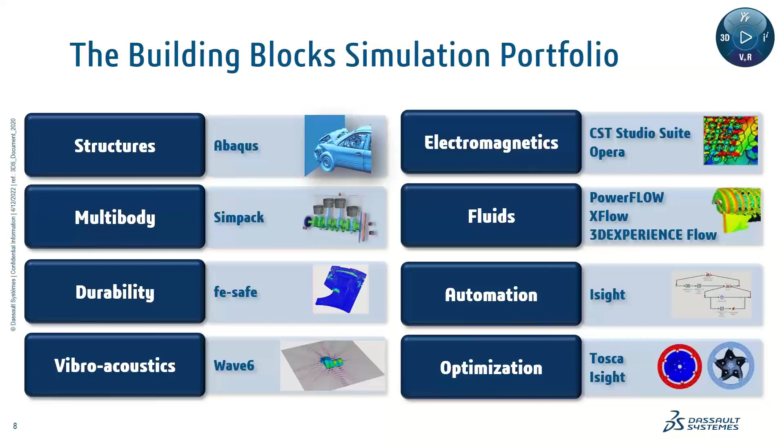So here's a quick agenda. I'm going to introduce Ramesh in just a second here. We're going to start by finding the best design. We're going to look at some structural integrity, then some advanced structural analysis, and then that'll be Ramesh. I will come back and talk about some of the other physics that are out there. And then we'll wrap it up with Q&A and some next steps or call to action.

And so without further ado, I'm going to turn it over to Ramesh, and let's go find the best design in some of our machine parts there. Ramesh?

So what we're going to do is, you saw in the introduction video, the customer was actually one of those highlighted, and so we're going to take their assembly. This company is a SolidWorks customer, a top international manufacturer based out of Lima, Peru. They make underground drilling machinery and related equipment that provides a better and more cost-effective alternative to traditional drilling rigs. For this first section, I'll be using a sub-assembly part from the leading mining equipment, called the Bolter 77D model.

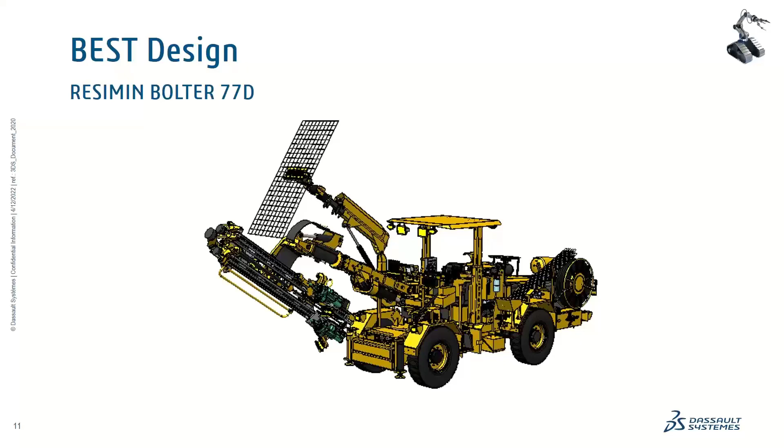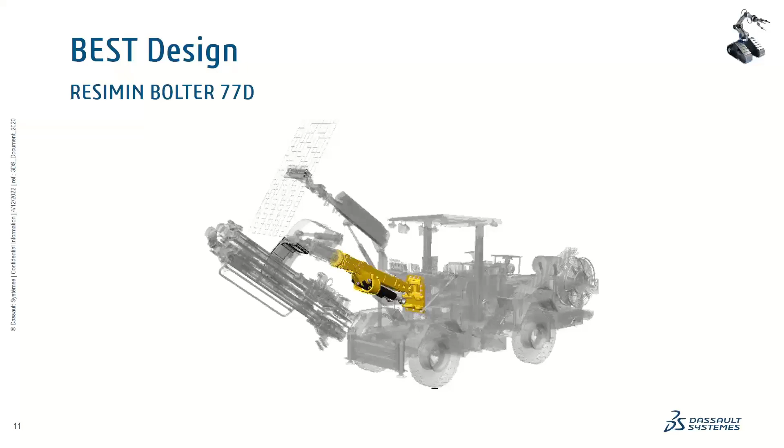Now, am I going to analyze the full assembly as shown here? Probably not. With simulation tools, the best way to achieve success is a crawl, walk, and run approach. We want to focus on the most important and critical pieces of the assembly rather than taking the entire assembly in the first go and running into issues.

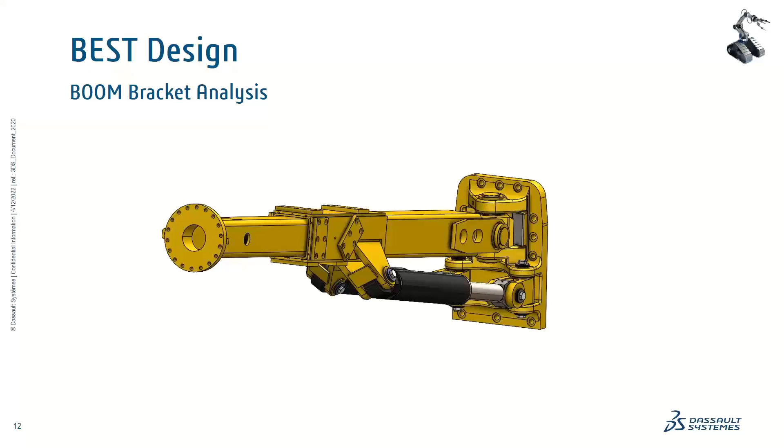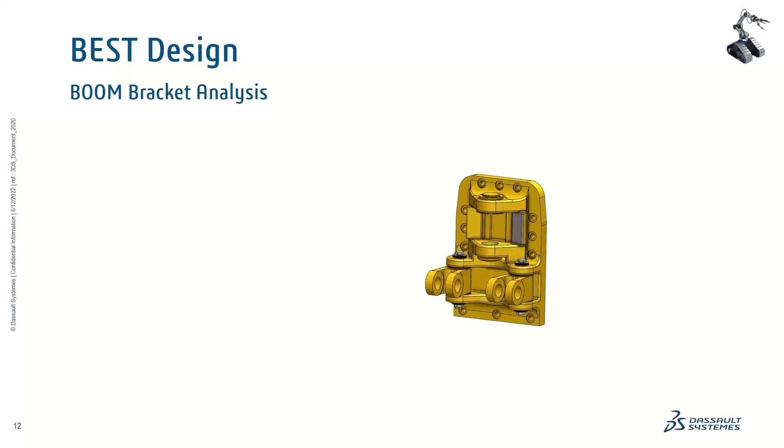So let's drill this down a little bit more to focus on this bracket assembly, which takes on the brunt of the loading. You can see how the entire boom assembly is cantilevered to this bracket, and this bracket actually has a knuckle joint. We'll analyze this knuckle joint as a designer.

So as a designer, let's say I'm in charge of the design process, but I'm also in charge of basic simulations. That could be just understanding the strength of the part, or being able to do a couple of design iterations, taking the design of this knuckle joint from point A to point B and coming up with an optimal design.

Then as a designer, I can pass on the best design to, let's say, the engineer or analyst within the company. That person could actually do a more comprehensive, complete simulation of the entire bracket assembly. So let's get started with looking at designer level simulation.

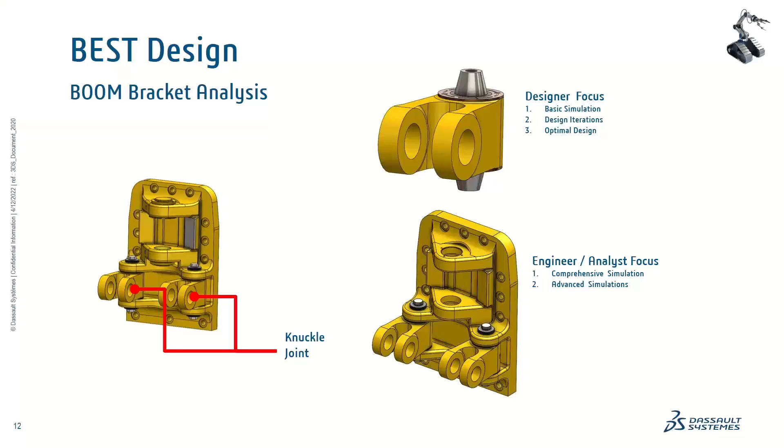What does this entail, right? So as always, I'm going to start off in SolidWorks. I have this bracket assembly, and it's only just half of the bracket assembly I'm going to analyze. That's a nice thing about simulation - you can take advantage of symmetry in the model and really simplify the analysis time and simplify the simulation itself.

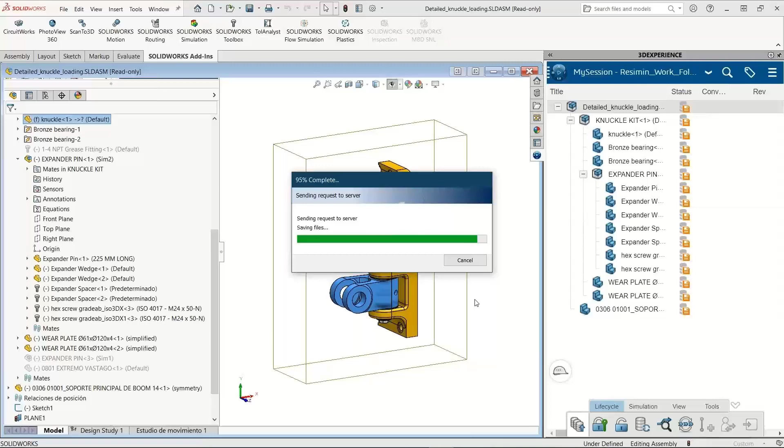So the first step, before I start using simulation, is to push this geometry through this connector into the 3DEXPERIENCE platform. That's where my simulation tools reside. It's a simple save operation - I'm pushing all the elements and parts of this assembly into the 3DEXPERIENCE platform. It's just a work folder on the cloud where all the files can be saved and converted into a format usable not just for simulation tools, but also by other applications relevant for your analysis needs.

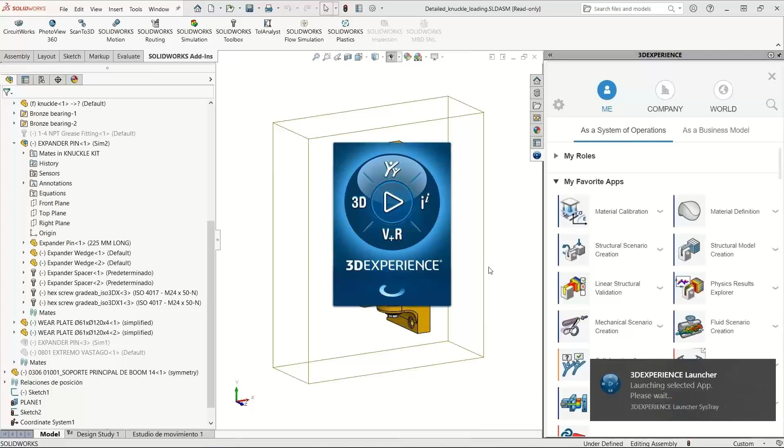So all I'm doing here is waiting for a green check mark, so that way I know all the files have been uploaded. Once I get a green check mark, then within SolidWorks, I can go ahead and launch my Linear Structural Validation. This is the simulation tool that allows me to do linear static analysis and any linear analysis, like buckling, thermal, or even frequency analysis. I'm just launching it right from within my SolidWorks desktop, and once the model is loaded up into the platform, I can start my simulation process.

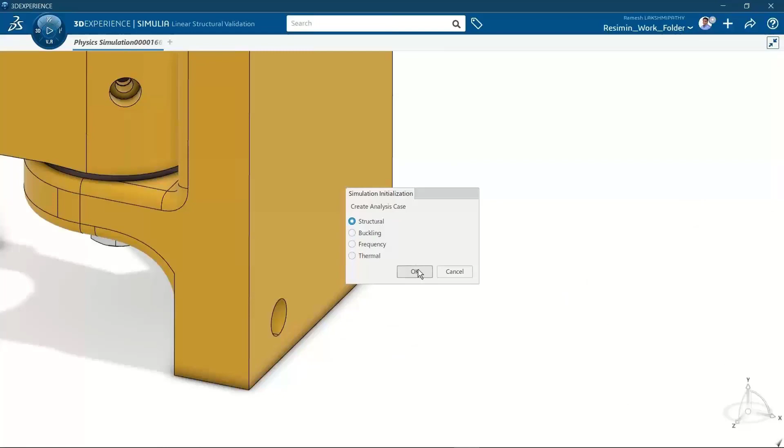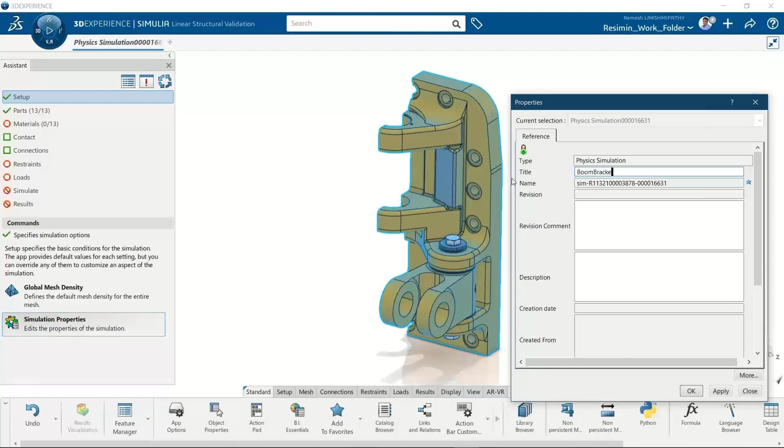All right, so let's go ahead - there you go. All I have to do is get started with my simulation. The first step is really what's the type of analysis. As a beginner, or let's say as a designer, I want the program to guide me through the process, so I'm going to use the assistant you're seeing here on the left side of your screen. I'll go ahead and set up my simulation, giving it a unique name - let's call it boom bracket simulation. Very simple step, that's basically done.

Next, I'm just going to go ahead and apply some mesh options. I'm going to turn on the adaptive meshing. As a designer, I don't want to wrestle with the meshing, but let the program automatically hone in on the best meshing for me. So that's what adaptive meshing does.

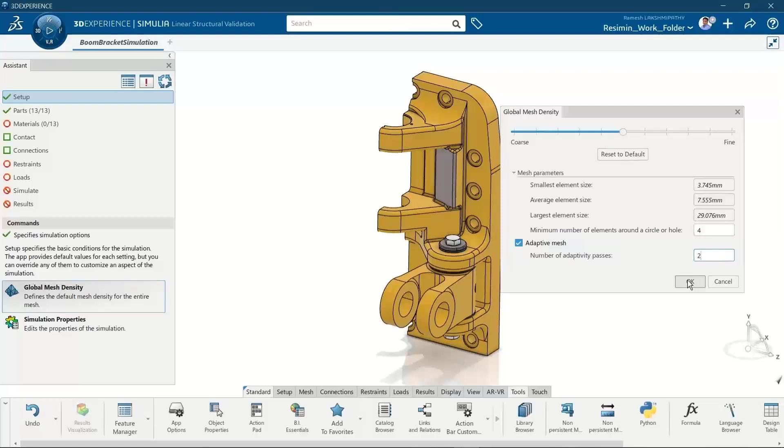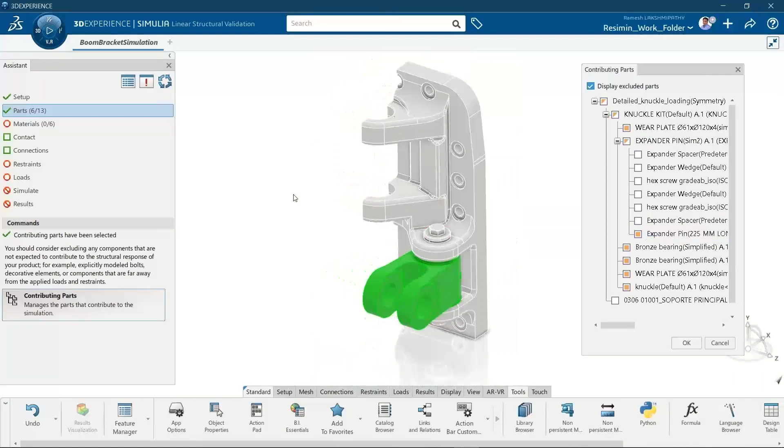All I'm going to do is just go ahead and tell the program to mesh. Then I'm just going to tell the program, look, as a designer, I just care about the knuckle joint, so I'm going to exclude all the other parts of my assembly. A very simple unchecking of the options helps me get to the geometry that I want to analyze. The green part is the geometry I want to analyze, and the gray ones are the ones I exclude from the analysis.

Next, I'm just going to go ahead and apply some materials. The nice thing about the 3DEXPERIENCE platform simulation is it comes built in with a material palette, so there's a library of materials ready to use, or if you want to define custom materials, that's also an option you have access to.

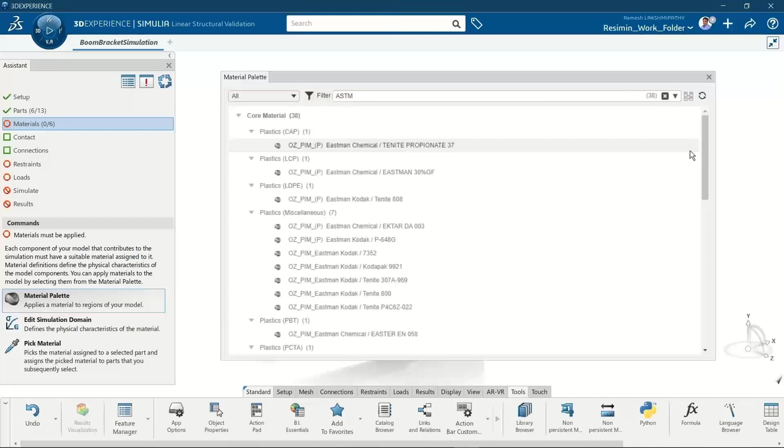Here I'm just going to search for ASTM, just to filter down my laundry list of materials. And there you go, so I have my material. I can verify some of the properties of this material and simply hit apply.

What I'm going to do is just grab one of the parts from the screen and propagate the selection to all the parts that I'm seeing on the screen. So in one single click, I can apply the material to all the parts of my assembly.

Now there's contact, but really in this analysis I don't want to simulate any physical interaction, but rather more of a bonded condition. So there's a tool that allows me to simply quickly find out all the contact, all the touching faces, and apply a bonded condition. You can see that's super easy, super fast. That's basically done. I don't have any connections in this assembly, but we'll see that later on.

But right now, I'm just concerned about simulating the physics. So I'm just going to grab these metal gaskets on the top and bottom, and I don't want these gaskets to move in the vertical direction. So that's the boundary condition I'm applying here.

Then another thing is I'm going to grab these conical faces and simply constrain the radial motion, or the radial deformation, of these conical faces.

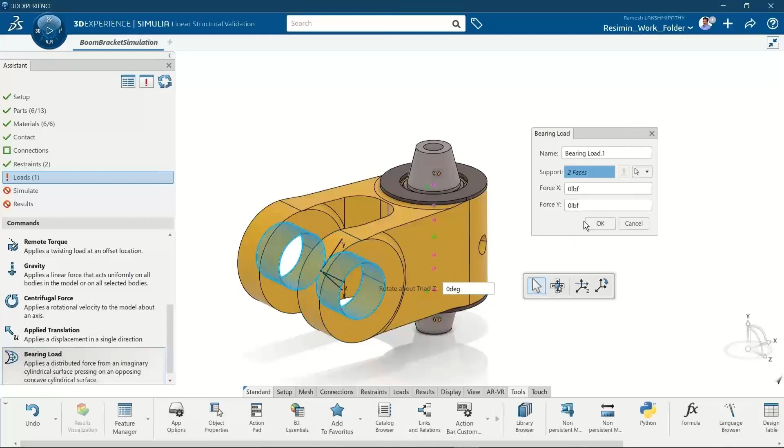The last thing I need to do is apply a load. So here is a bearing load. I'm going to select those two faces of interest, and I'm going to orient my coordinate system on the fly. I'm just going to tilt it by about 45 degrees so I can get the X direction of interest, and apply a 20,000 pound force as the bearing load.

So very simple steps. This assistant is a great way to get started and guide us through the setup process. The last thing I need to do is simply give this guy a spin, so I'm going to simulate the analysis.

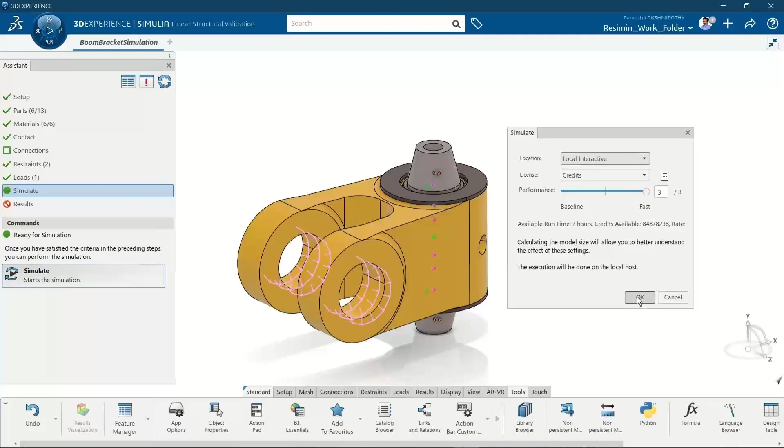There's a couple of things you can do. You can run the simulation on the local machine, or if you don't have the hardware infrastructure, we can also run the analysis on the cloud. This is a simple problem, so I'm going to run this on my local machine, take advantage of all four processors that I have, and run the analysis. Right now it's actually cranking through the analysis.

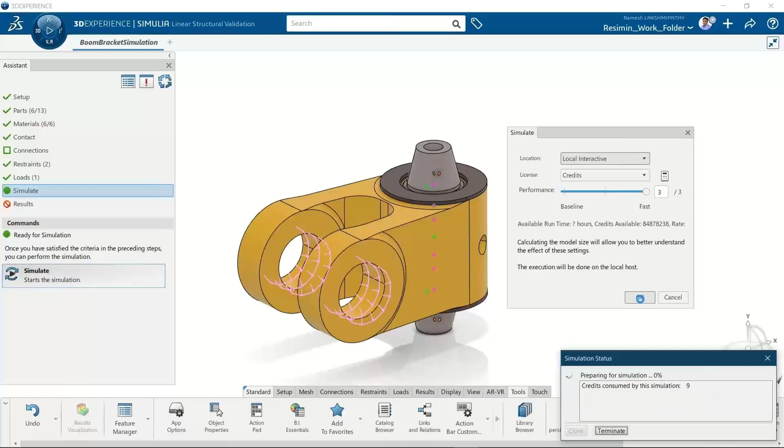It'll take a few seconds to come back with the results, and we'll just investigate some of the key results, such as factor of safety, maybe the displacements, how the structure is actually deforming, maybe even look at some of the areas where there are tensile and compressive stresses. We'll see in just a few seconds what are some of the key results you have access to once the analysis is done.

So here I'm looking at the default von Mises stress plot. I can do a lot of things here, but really I want to get started with looking at the animation, right? How the structure is deforming, is it bending, twisting, shearing? If so, in what direction is that acceptable? But right from the graphics area, I can switch to a displacement result, or maybe look at the factor of safety.

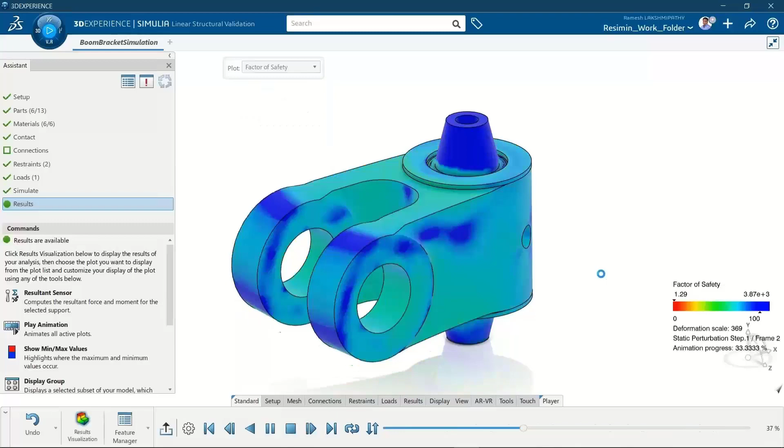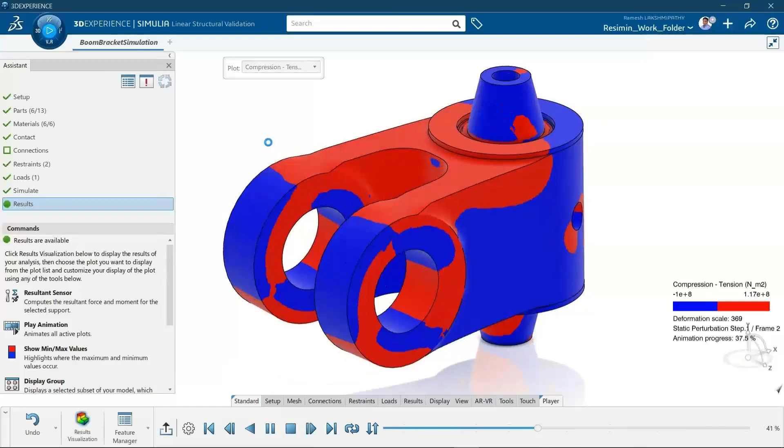That's about a 1.3 minimum factor of safety. And then I can look at a bunch of other results like displacement vector, and get more granular information as to what the direction of deformation is, or how the reaction forces are actually getting reacted at the support locations. So I can get a very high, rich visual of the different types of results. And here, for example, I'm also looking at where the tensile areas are, where the compressive areas are. So there's a whole bunch of results that get created right off the bat.

As a designer, I can skim through all of these results to make some design decisions. So I have factor of safety 1.3. That looks pretty good, but maybe that gives me an idea that I can reduce the thickness of these extrudes and maybe change the radius, maybe make this entire knuckle joint a little bit lighter.

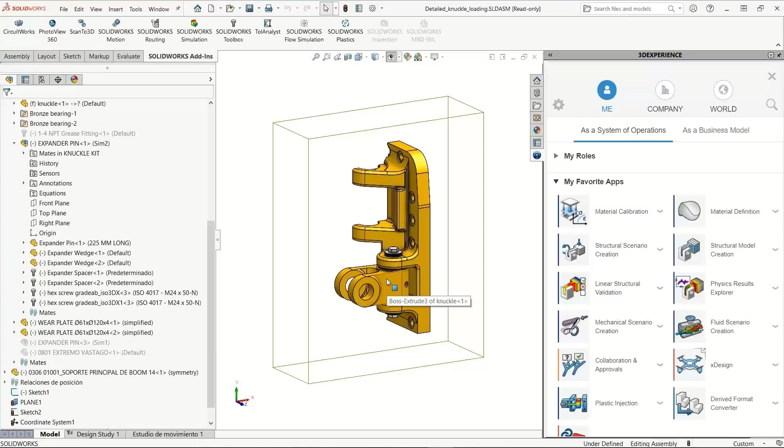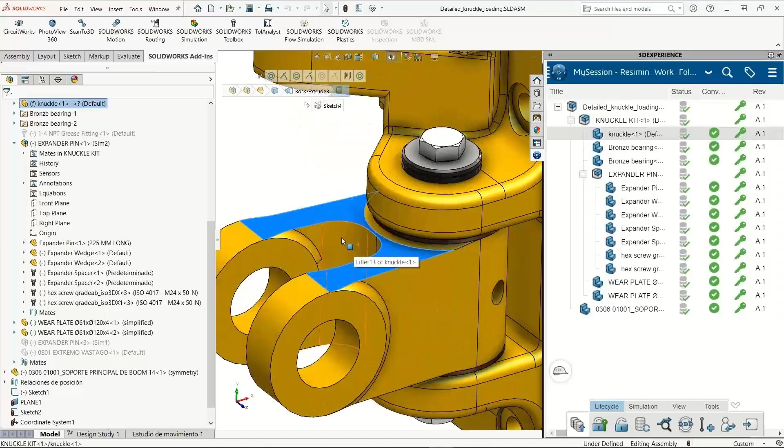So I'm going to go back into SOLIDWORKS, and the first thing I want to do is just reserve this. Reserve is nothing but it actually allows me to have access to these files, so that if somebody else is working on this assembly, I don't accidentally override it. All I want to do is just go ahead and make some changes to the dimensions on the knuckle joint. So I'm just going to grab that top face and also the radius, and I'm going to change the radius value.

Let's say it's 30 millimeters. So I'm going to just specify about 10 millimeters radius. And then likewise, I'm going to grab the other dimension that controls the thickness. Right now it's 30 millimeters, I'm going to change that to about 20 millimeters.

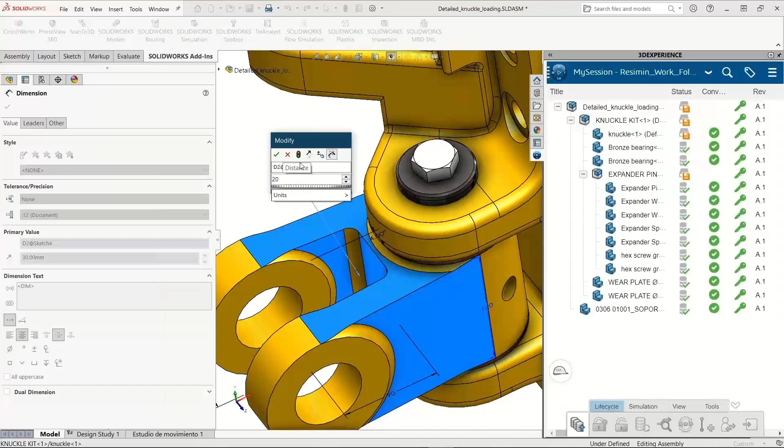A simple step, basically done. So you can see how I've reduced just the lightweight of the design. And once I do that, all I have to do is push this new design through this connection back into the 3DEXPERIENCE platform to continue with my simulations.

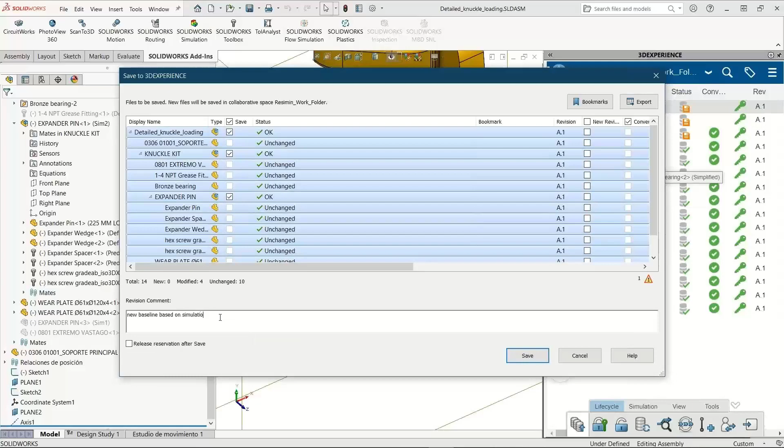So again, we are designing and simulating side by side. Even though we're using SOLIDWORKS Desktop for our design purposes and we're using the simulation on the 3D Experience platform, they are actually connected through this interface. That way we can drive design changes very quickly, and it's completely associative in nature. So that allows us to try out all these multiple design iterations as we are designing and simulating side by side. So that looks pretty good.

I'm going to come back into the 3D Experience platform simulation. And what I want to do is just refresh the environment, so that it'll detect if any changes took place on the SOLIDWORKS side. And you can see that right off the bat, I have the design propagated to my simulation environment. At this point, I'm not doing anything other than re-simulating this new design. The mesh automatically updates, and the physics remains the same.

So I'm just going to go ahead and rerun the simulation. A very simple step. This way, I can try multiple flavors of my designs very quickly and see what that design's performance looks like. So let's see, let's wait for the analysis results to come back. And I'm most interested in looking at, again, the factor of safety.

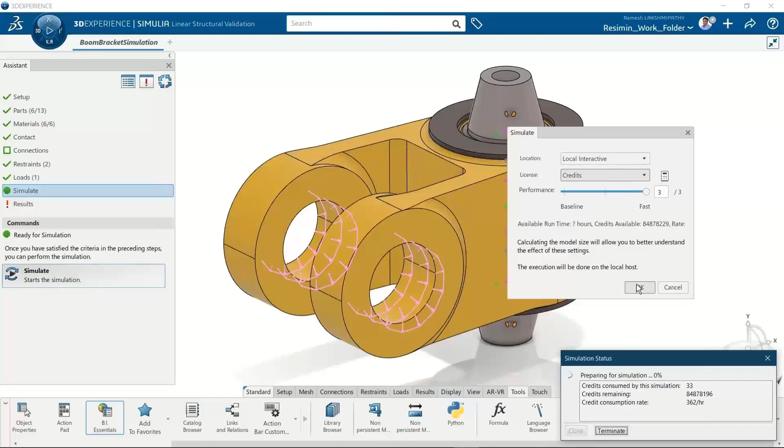So again, a great way to be able to take something as simple as this knuckle joint at the designer level, and then be able to do multiple iterations of the design and make the design a lot better. And you can see the factor of safety now is about 1.07. So that's still acceptable. But at this point, I want to hand off this design to my analyst or to my engineer in the company.

So I'm going to take advantage of some web tools on the 3D Experience platform. What you're seeing here is I'm going to make a copy of the simulation, and make that copy available to my analyst. So what this allows me to accomplish is the fact that even though I make a copy, the design for both my simulation at the designer level, as well as the simulation that the analyst is going to work on, are both going to be tied to the same exact SOLIDWORKS design.

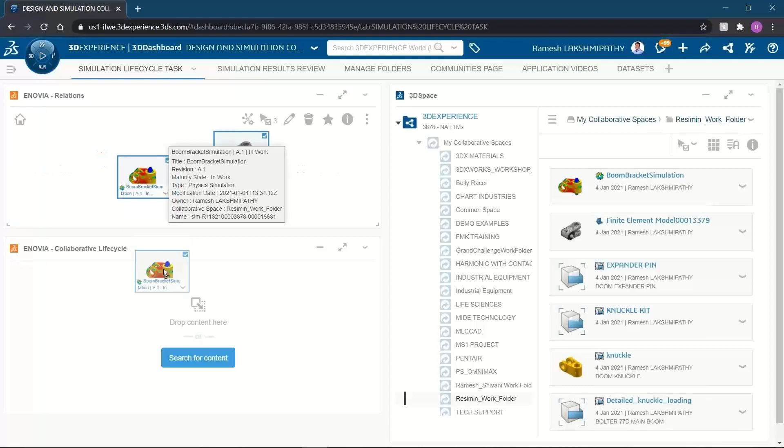So in the future, if the design changes, that design change is going to propagate to the designer level as well as to the analyst. So it's a nice way to actually exchange information in one single environment with a connected set of tools.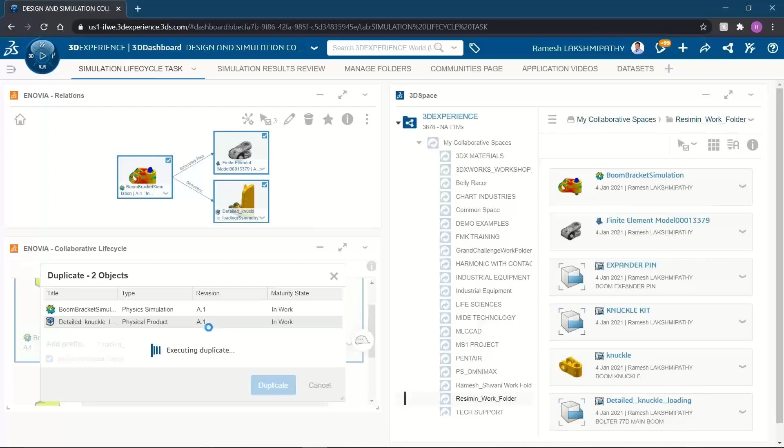So the process you're seeing here is using a web browser. I'm just giving it a new name, but I'm making an exact duplicate copy of my simulation, my finite element mesh, and my geometry in one single go. Once this operation is completed, I can let my analyst or engineer know they can access the duplicate copy for a more advanced or comprehensive simulation.

So what happened is the duplicate copy is what the analyst or engineer is opening using a more advanced simulation tool on the 3D Experience platform. Once that is done, we can move on to the next step where the analyst is going to do a more complete simulation.

So what I want to do is switch back into the 3D Experience platform real quick. I'm not going to be showing you just PowerPoints today. So this is my 3D Experience platform.

So as the analyst, let's say I did this full analysis. I see the knuckle joint that is being used as part of the bracket assembly. As an analyst, let's say I've done the simulation, but what I want to really highlight here is not walk you through the entire process start to finish, because you've already seen that at the designer level—how the simulation is set up and run. The same concept, same workflow exists for the analyst or engineer. But what I want to focus on is a few key areas, technologies on the 3D Experience platform.

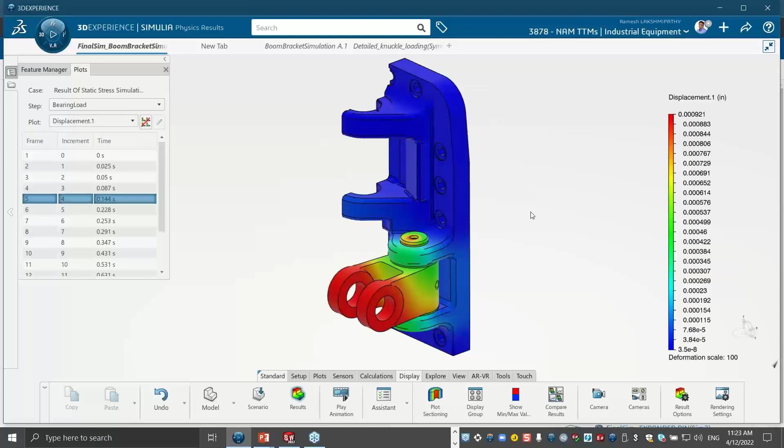So, for example, I ran the analysis on half the geometry, right? So what I want to do is quickly mimic this. I want to take the symmetry and mirror the results about the symmetry plane, so when I'm documenting the analysis results, my boss isn't asking what happened to the rest of the model. So even though for simulation I made it super simple by analyzing half the geometry, for the full simulation I can visualize the full results, as you can see here.

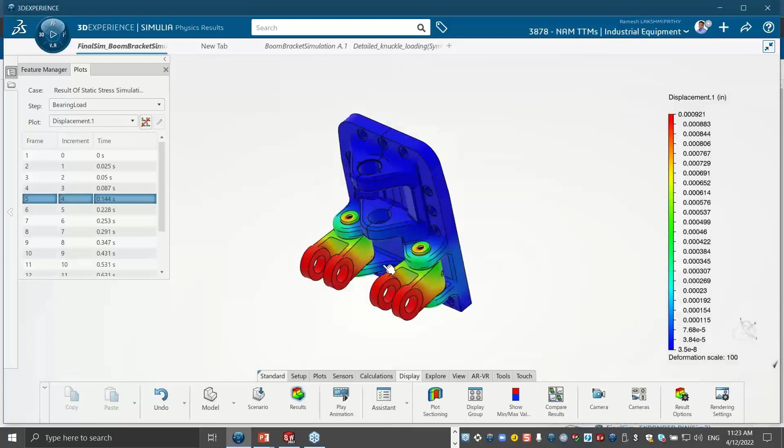And you can see as I'm moving the mouse over the geometry, I'm getting some values. Those values are the current result, which is the displacement result. The displacement is being shown at the location of interest. As I hover the mouse, you can see those values. Okay, so there's a lot you can do here.

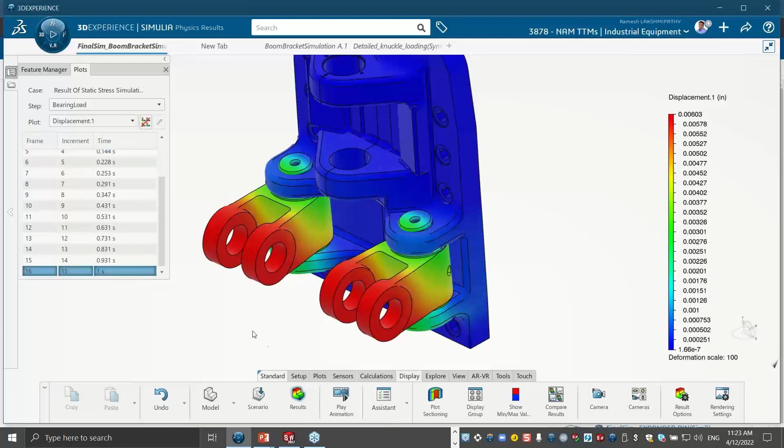So let's go ahead and animate this. You can see that analyzing just the knuckle joint versus the full assembly gives a much more comprehensive, complete simulation, allowing me to get a bigger, more granular picture in terms of analyzing this entire bracket assembly. So I can see how these knuckle joints are actually moving.

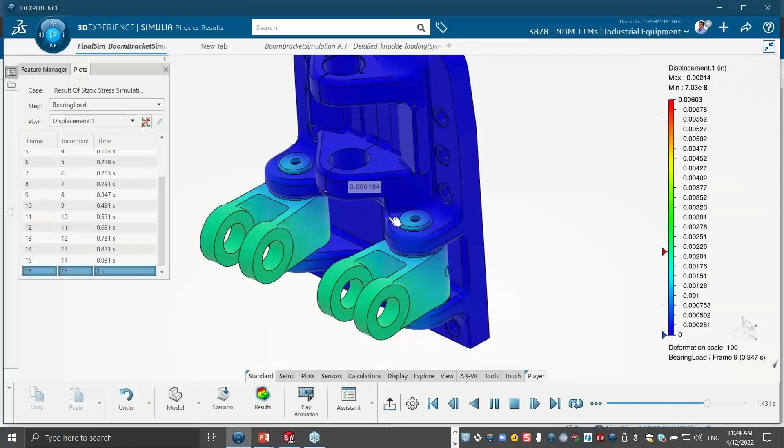I have the bolt connections—I'm using some bolt connections to tie the knuckle joint to the bracket part. So one of the things I might be interested in analyzing is what the bolt forces are.

So here, for example, I can quickly go to my XY plot result and activate it. I just want to view it, not the definition. So there you go—this is a force versus time plot, telling us what the bolt loading looks like in the system during the deformation. Initially we're applying a preload in the bolt, so that's the linear part of this plot.

And then as soon as I apply the bearing loads, the bolt loads actually exhibit a nonlinear behavior, which is pretty interesting to note. It gives us a good idea of what's really happening in the bolt. Even though we're not modeling the bolt's physical geometry or including it in the actual analysis, I can still use these virtual bolt connectors and get some key results that help me make good design decisions—is this bolt good enough?

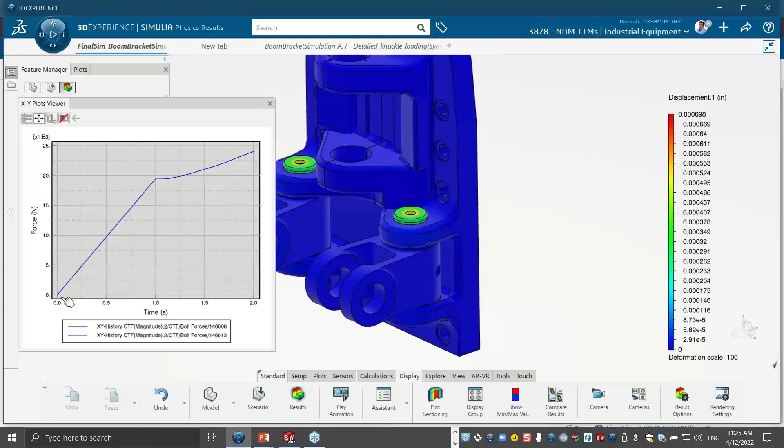Can I get away with the existing bolt I'm using, or do I need a bigger size bolt, or can I get away with a smaller size bolt? So that type of information can be really crucial from an engineering perspective when we are using fasteners to connect two or more parts in our assembly.

So this is just the results side of it. I want to highlight a few things that are really nice to understand. The first thing I want you to notice is that we're using a coupling. A coupling is a way to transmit a remote load in space. Here, for example, we are not modeling the boom that's connected to the knuckle joint, but rather using a coupling connection to transmit the actual load onto these two cylindrical faces on the knuckle joint.

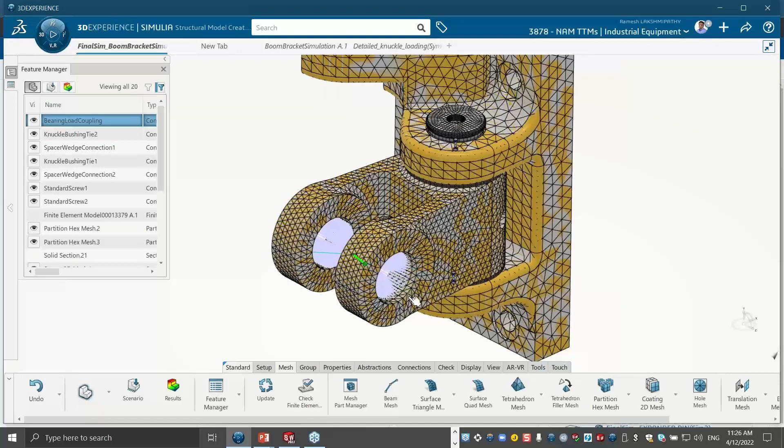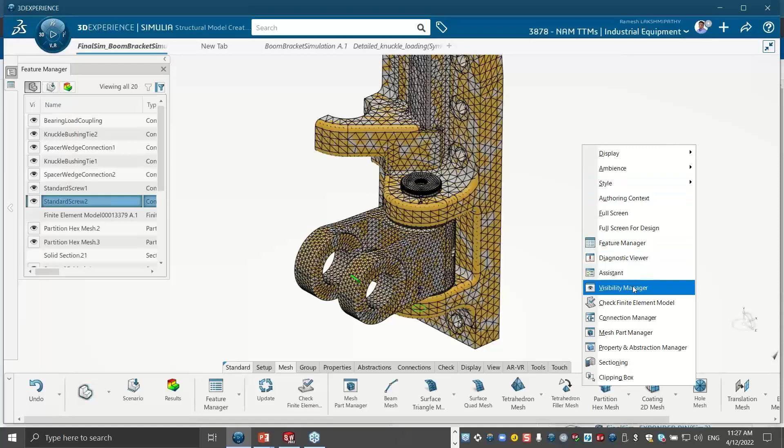The other one is the meshing. You can see the mesh is displayed on the screen. Let me clean this up a little bit - I'm going to hide the geometry so you can see the mesh, and zoom in. You can see that this gasket here I'm actually modeling using hexahedral elements, hexahedrons, and the rest of the assembly is using tetrahedrons. So I can mix and match different element types.

As an engineer, as an analyst, I would like to have full control over meshing options, and that's exactly what you see here. Down here at the bottom in this menu, you can see that we can do a beam mesh, a triangular mesh, a quad mesh, a tetrahedron mesh, and also a variety of hexahedrons such as a sweep mesh, partition hex mesh, hex dominant. There are some advanced meshing tools also available for you as an engineer or analyst to take a deep dive into controlling the mesh.

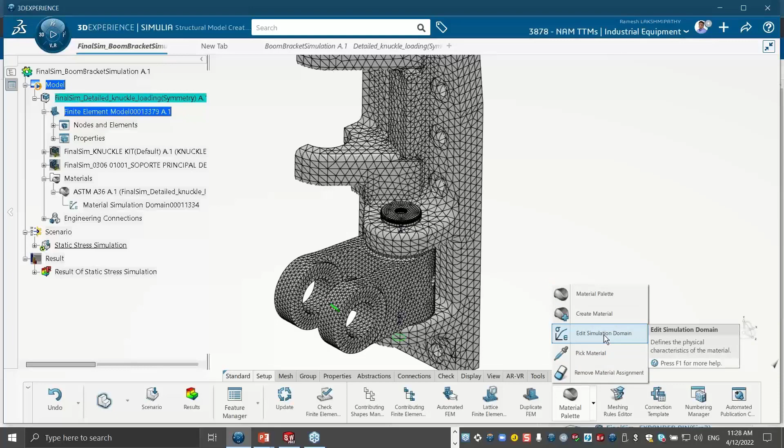The next one I want to point out - let me go ahead and look at some of the materials. I want to bring up the material, even though in this case we use a linear material, but what I want you to see is the material options that you have on the 3D Experience platform. There's a lot of different types of material behaviors that you can use and combine together in a single analysis.

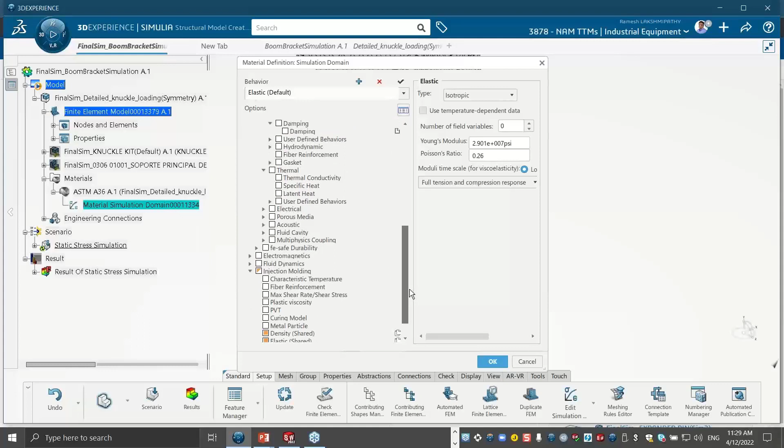You can see that there's elastic effect, plastic effects, and a lot of different types of advanced material models - not just plasticity, but if you are trying to simulate maybe a hyperelastic material, a foam material or a gasket material, or combine that with other physical effects such as thermal stress or thermal properties, useful if you want to do a thermal stress analysis. You can combine your structural properties with other thermal properties or fluid properties as well. So there's a lot of different material models available for you to simulate the exact real behavior of your material.

That's one thing. The last couple of things I would like to highlight - let's go here to our scenario, which is our physics environment. And here I want to highlight one key technology that's called generalized contact.

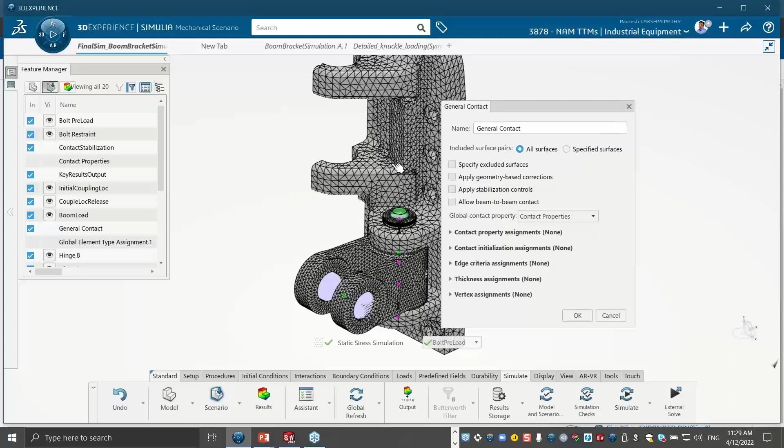Generalized contact is a unique Abaqus technology. Switching on this option literally means that we are not defining any contact conditions, okay? So that way it helps eliminate the upfront guesswork we otherwise have to do to define those contact definitions. During the solve, the program will automatically determine all the contacts that might happen between multiple geometric entities.

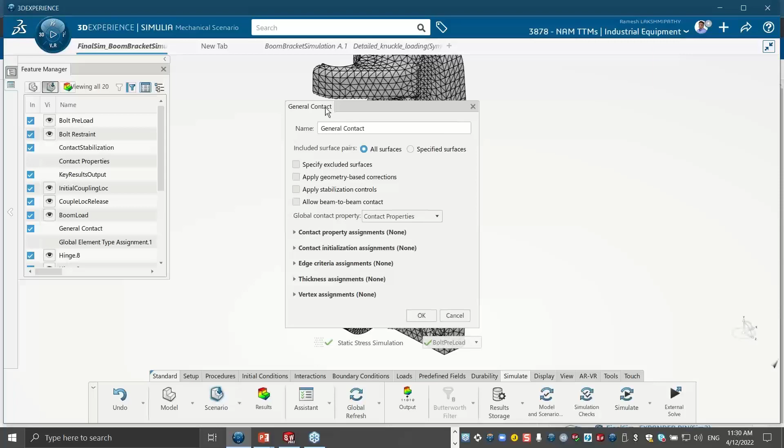But what we can do is we can actually control the contact behavior. So for example, I can tell the program I want to include a coefficient of friction in my contact definitions, or I can control the tangential or normal behavior of the contacts.

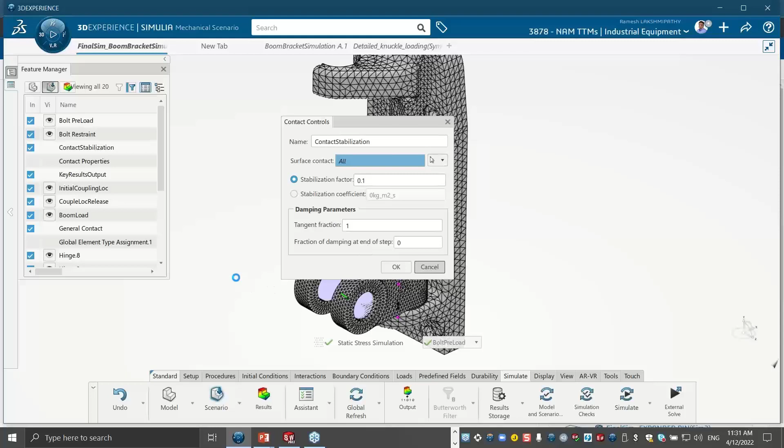I can also turn on contact stabilization, which is really a powerful tool. A lot of times when you have contact analysis, you might run into stability issues. So by turning on contact stabilization, the program allows the solver to get past an issue with the contact—maybe there's chattering in the contact area, or some unbalanced forces. Contact stabilization will take care of all of those things and make sure our problem runs to completion.

And the last thing you saw in the earlier setup was being able to run the problem on the cloud. So if I do a simulate, hopefully this will bring it up in just a few seconds. So obviously what I want to show you is... there you go. So basically you can run the problem on the cloud, or you can run it locally as well.

On the cloud, if you choose to run there, you have access to running the problem up to 144 cores with more than 100 GB plus memory. So think about it—if you don't have the hardware infrastructure within your company to run these large problems, or if you simply want to run problems much faster than you're used to, you can take advantage of the cloud compute option available on the 3D Experience platform.

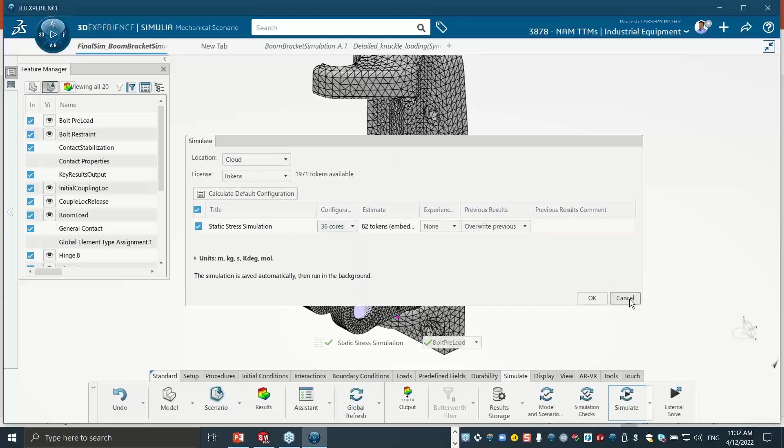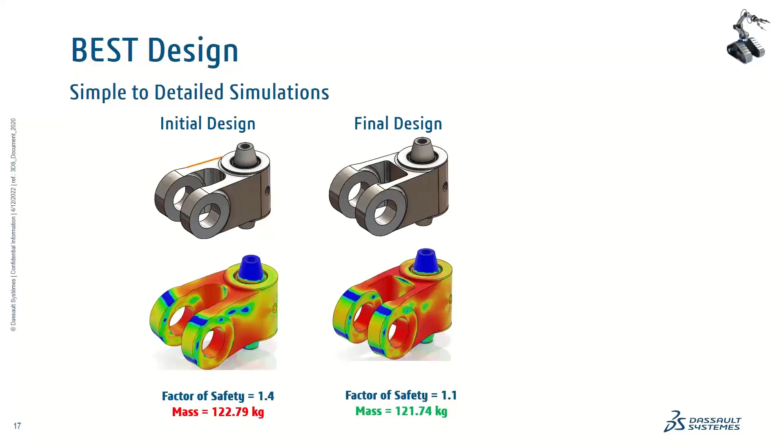Just to recap real quick, we saw the initial design at the designer level. We looked at the knuckle joint design with a factor of safety of 1.3, 1.4 initially, and we were also monitoring the mass. Then we made a quick design change and looked at the final factor of safety, which was 1.1, successfully reducing or lightweighting the knuckle joint design.

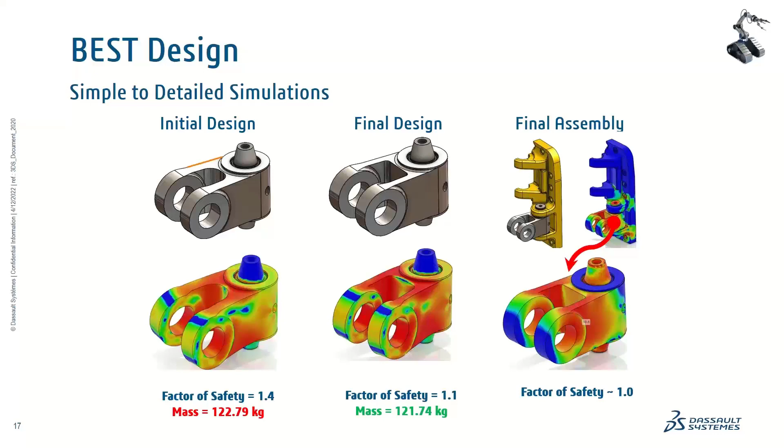But then you saw how the designer passed on that analysis as a duplicate to the analyst, who took that duplicate simulation, made all the changes necessary, and made a more comprehensive setup of the simulation to get an idea of what the entire assembly response looks like, what the bolt connection forces look like, and so on. So basically it's a complete loop—a designer doing design and basic level simulation, and then the analyst coming in to do a more complete and comprehensive simulation.

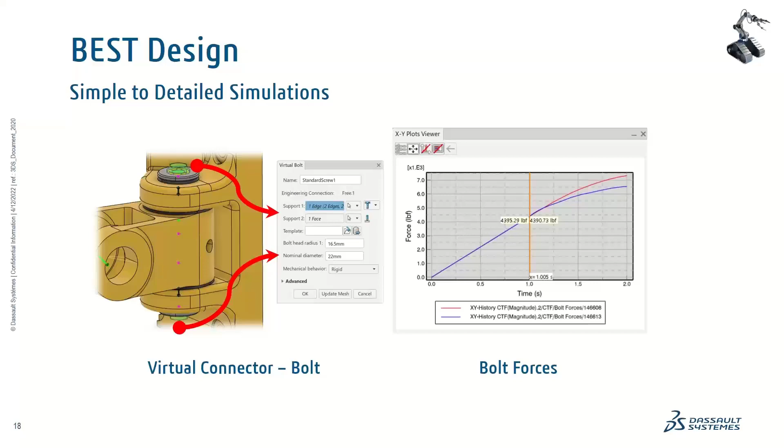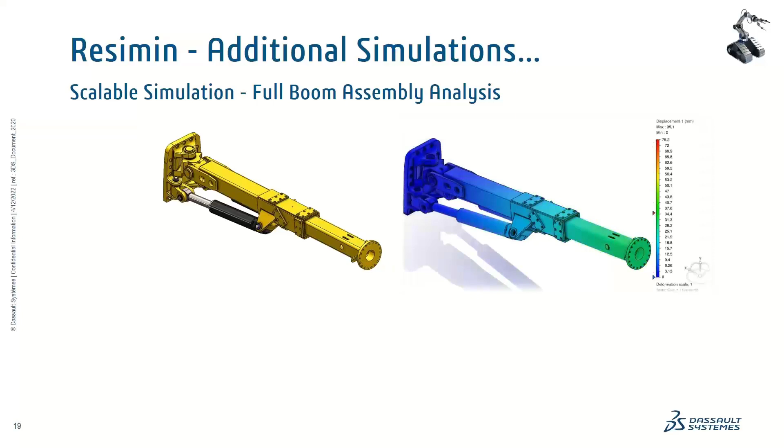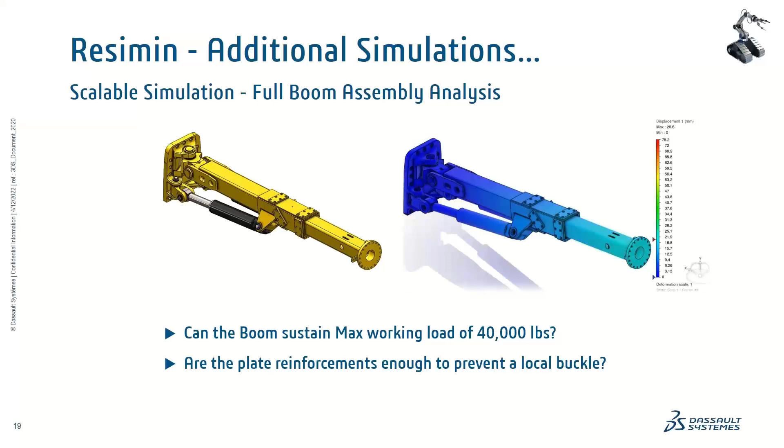We also saw, for example, going from simple to detailed simulations using a virtual bolt connector, how we can request or get key results of interest such as bolt forces. You can use the same workflows and process to scale your simulations to a much more complete analysis, such as this full boom assembly analysis, to answer simple questions like: can the boom sustain the maximum working load of 40,000 pounds? Are the plate reinforcements enough to prevent a local buckling effect? You can analyze all of those additional physics.

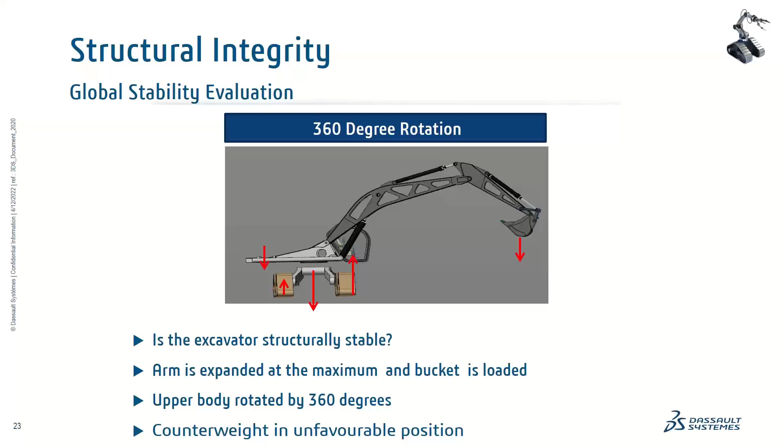Moving on to the next segment, understanding some of the other structural integrity issues relevant in the industrial equipment industry. Let's start with the global stability evaluation of this excavator. Some key questions you might want answers to using simulation: Is it structurally stable? What happens if the arm is expanded to maximum length and the bucket is loaded to its full potential? What if the upper body rotates 360 degrees? What if the counterweights are in an unfavorable position? Simulation can answer a lot of these questions.

For example, you can see this entire assembly being analyzed on the 3D Experience platform, and all we care for is looking at whether the maximum dynamic stresses on the structure are acceptable or not. We can also go ahead and look at other elements.

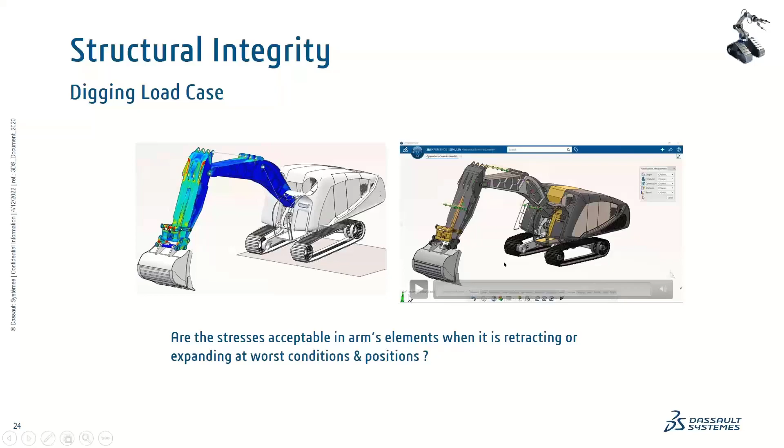For example, if you look at the excavator itself, there are so many parts that undergo repetitive loading and unloading operations, and perhaps understanding the structural integrity of the plates connecting the main boom, let's say, and the bucket could be important in terms of how durable it is, right? Because if the plate breaks, that means failure of the entire system, and it's also a safety issue.

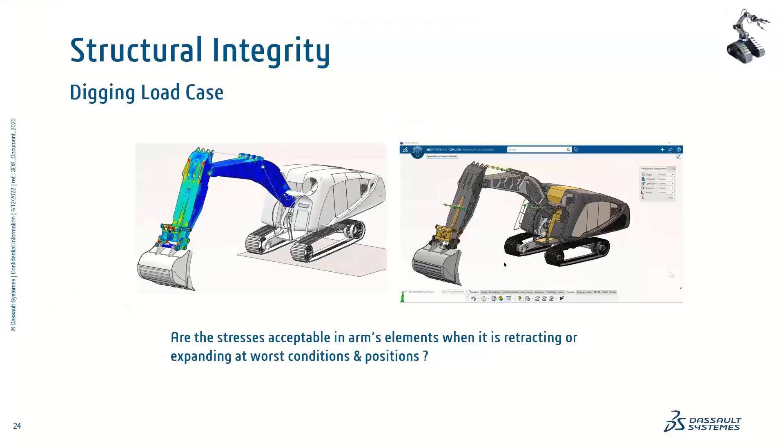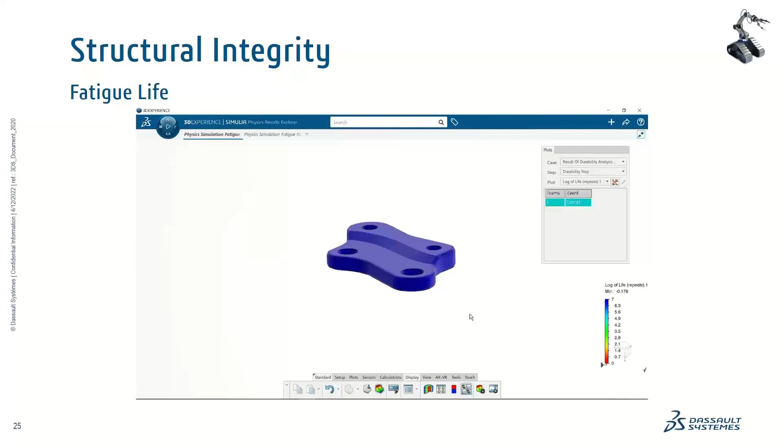So what we can do is actually perform a fatigue analysis, but on just the plate part alone, and compare an initial design and a second design that's modified, but is a better design that helps increase the fatigue life. So fatigue analysis is a great extension to static analysis in order to paint a complete picture of your designs. So let's look at some advanced structural analysis that might be of interest.

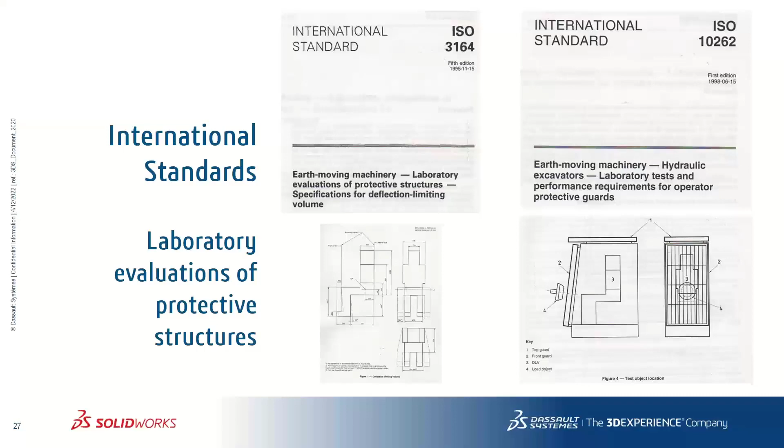A lot of times, you have to satisfy international standards such as ISO 3164 or ISO 10262, and there could be lab evaluations of protective structures, or what we call ROPS, rollover protective structures.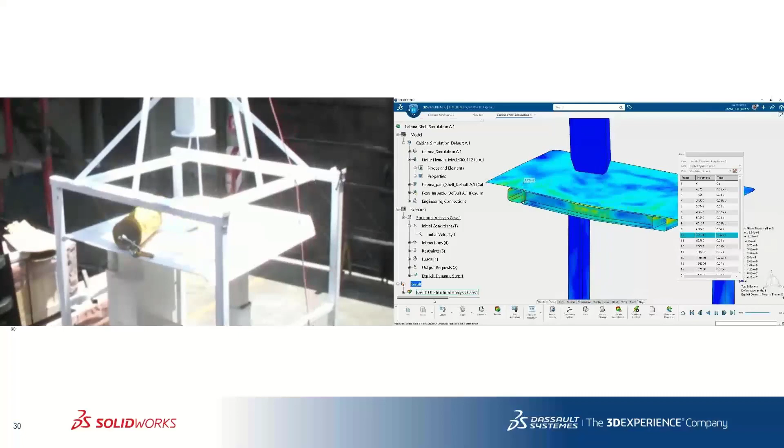So this is absolutely essential, because when you're simulating ROPS, it could be an industry requirement. You have to satisfy protocols as per the industry standards and make sure that the energy absorption of the structure is within the threshold limits specified for that particular design.

A lot of times you can also model, on the 3D Experience platform, what is called damage modeling. So it's not just plastic effect that you want, permanent deformation effects, but there could be a scenario where you want to see how the structure starts to disintegrate. We call that damage modeling, where the structure loses its stiffness completely in the plastic phase, and then starts to break apart. You can model that, what we call progressive damage modeling, on the 3D Experience platform.

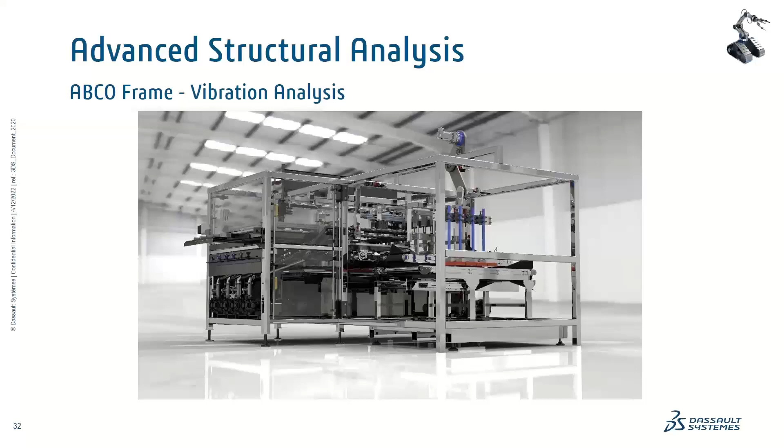So the next couple of examples real quick: this is ABCO, another SOLIDWORKS customer. You're seeing a weldment frame, and right at the top, you can see there's a robotic arm. This robotic arm is a pick and place machine, and because of the motion, it induces vibration on the weldment structure.

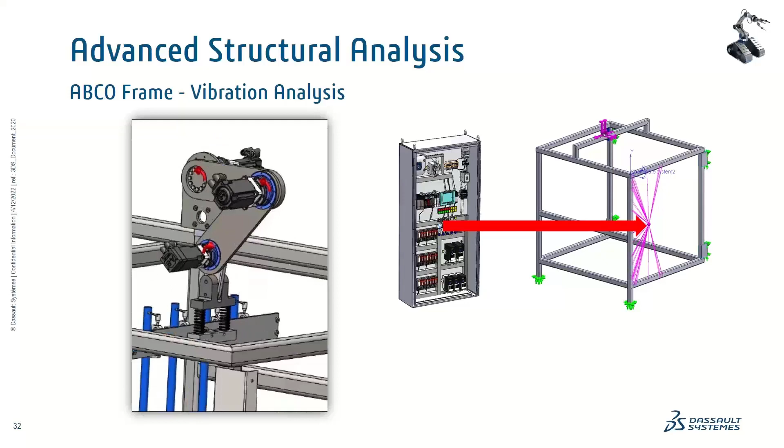And what we really care about is this electric cabinet that's sitting there, marked as the center of mass of that electrical cabinet, which is of interest to us. Because of vibration, we want to make sure that we don't see excessive vibration in the cabinet assembly, since there's a lot of electronic and electrical components that can get damaged because of vibration effects.

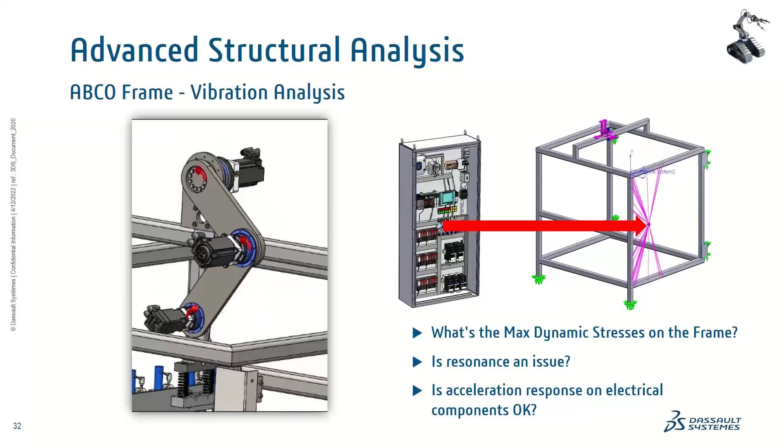So a few good questions to analyze here using simulation are: what is the maximum dynamic stress on the frame? That's easy, but the key thing we're after, the key KPI, is resonance issues and acceleration response on the electrical components. Using the 3D Experience platform simulation, we can again take this weldment structure.

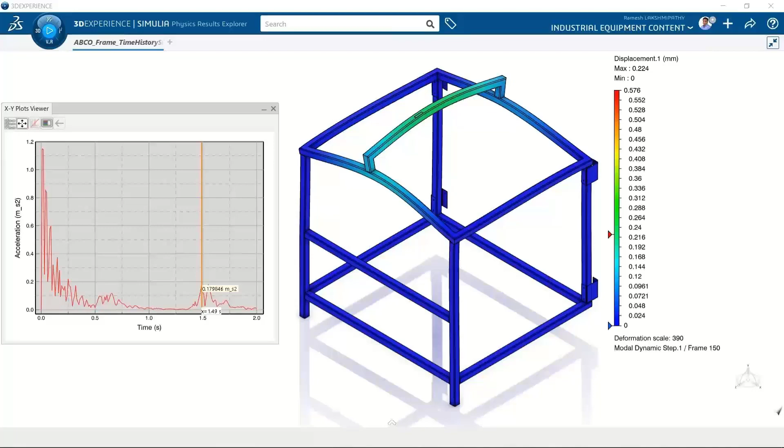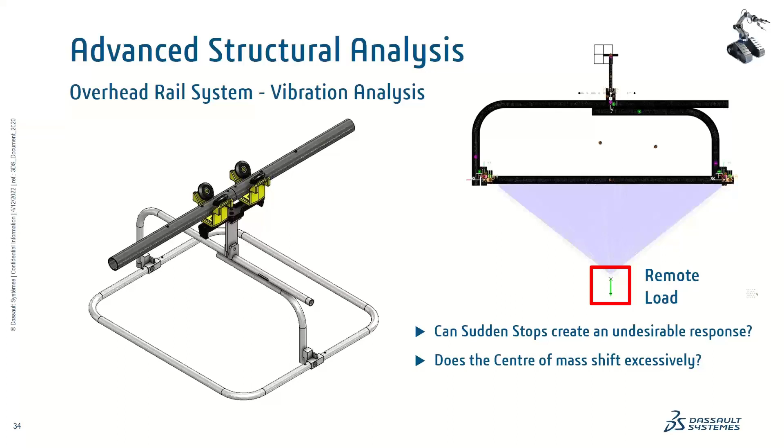Another nice example is an overhead rail system. This rail system is like a big bucket carrying a lot of load, and you could typically see this in a factory shop floor. What we are concerned about is, what if this rail system is moving and then suddenly has to come to a sudden stop? Is that going to create an undesirable response in the system, and cause the center of mass to shift excessively? What's the overall reaction force or moment at the support location?

So, again, I'm just showing you different examples that could be relevant. This is showing, for example, if the structure comes to an abrupt stop, what will happen visually in terms of vibration effects, and how that affects the displacement and overall support reaction loads.

And with that, I'm actually going to hand it back to Dana, who's going to cover a couple of other sections in this presentation and wrap it up. Dana? Perfect, great job Ramesh.

Thank you so much. So this is what I call, but wait, there's more, right? We talked all about structural, but we do have some other functionalities as well that can certainly help with your design and validation of your components and your assembly.

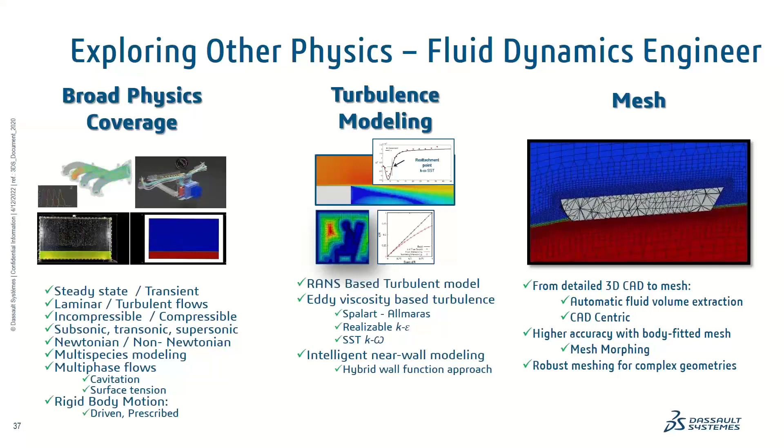So the first one is our Fluid Dynamics Engineer. It's a very, very broad and diverse tool, being able to do all things related to computational fluid dynamics. You can see some of the highlights: compressible, incompressible, Newtonian flows, and non-Newtonian. We have additional turbulence models, the K epsilon and the K omega. We have a RANS-based model now for turbulence, as well as better, more robust meshing. So it's a full-blown tool running on the 3D Experience platform for computational fluid dynamics.

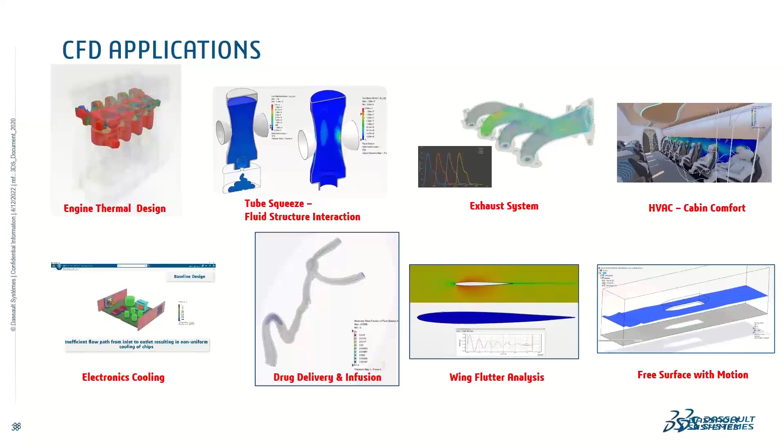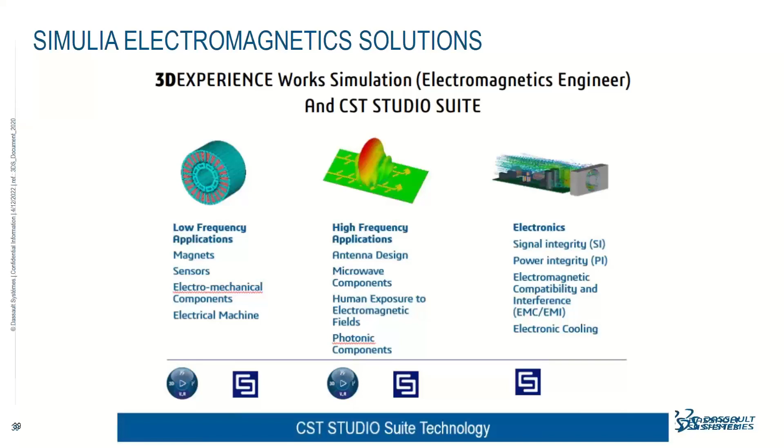Another one to look at, this is new to our family: we now have Electromagnetics Engineer, which brings electromagnetics into the fold, for both low and high frequency applications. It's based upon the CST Studio Suite tools. I won't read everything here, but anything related to any type of 5G connection, IoT stuff -- that's becoming an important component of successful machinery design. There are different applications here. It's a full-blown electromagnetics and electromagnetic interference and compatibility type of tool. Again, if you're looking at IoT type applications for your machinery and industrial designs, this is what you have.

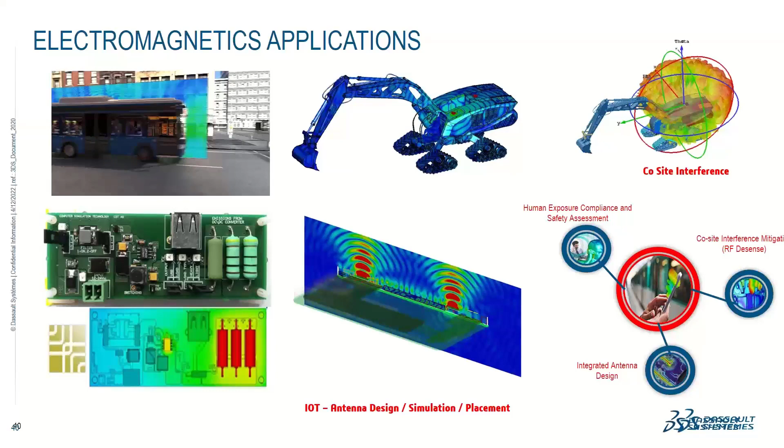Okay, so let's wrap this up. As you saw, Ramesh really worked through and found a really good design. You saw a lot of information that you can extract from the 3D Experience simulation tools. We talked about structural integrity to establish a safe working environment, also throwing in some complex physics -- we offer an explicit solver which enables crash testing, impacts, and drop testing. Then we talked about some of the other physics: keep in mind we have computational fluid dynamics as well as electromagnetics to complement and enhance the 3D Experience mechanical simulation tools. So we'll go ahead and wrap this up.